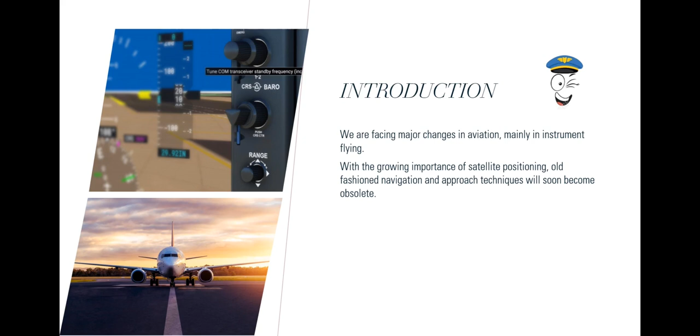Introduction. We are facing major changes in aviation, mainly in instrument flying. With the growing importance of satellite positioning, old-fashioned navigation and approach techniques will soon become obsolete. What about pilot core competencies? Are we bound to follow the line and nothing more, or should we keep training those procedures and techniques to keep what makes a pilot a pilot: mastering?

You think right if you are watching this video. Let's train as a pilot. Satellite navigation and approach techniques will be a part of your training.

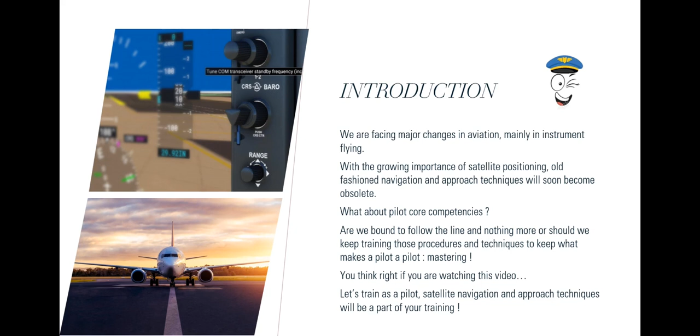Theory, system description. The non-directional radio beacon, NDB, is a low or medium frequency radio beacon that transmits non-directional signals, whereby the pilot of an aircraft properly equipped can determine bearings and home to the station. The pilot, through the use of an automatic direction finder, uses these signals in order to determine relative, magnetic bearing and therefore position.

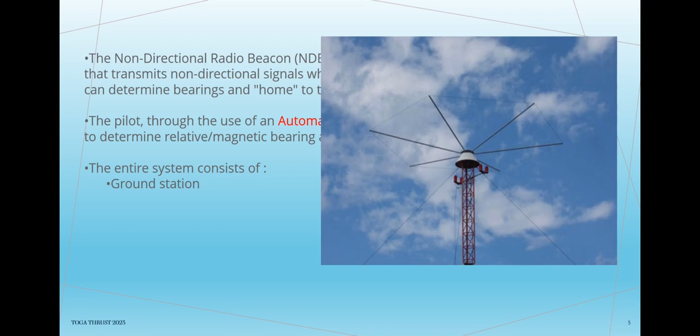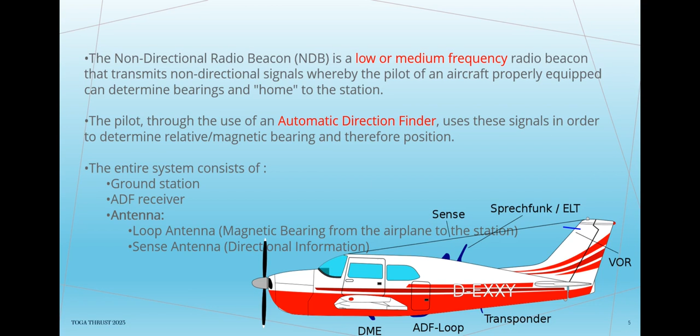The entire system consists of ground station, ADF receiver, antenna, loop antenna, magnetic bearing from the airplane to the station, sense antenna, directional information. Now, both antennas are combined into one single element. Bearing indicator.

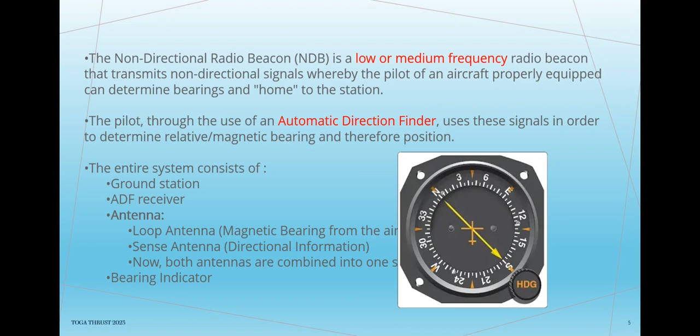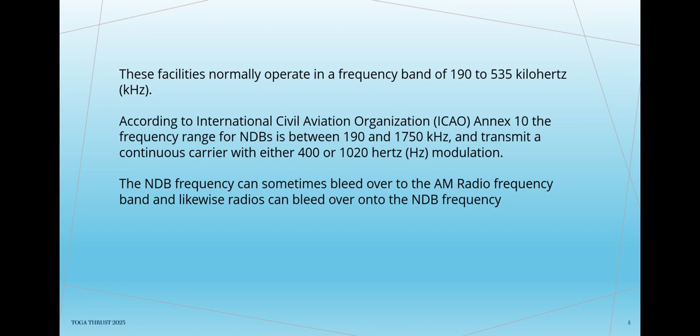These facilities normally operate in a frequency band of 190 to 535 kHz. According to International Civil Aviation Organization, ICAO, Annex 10, the frequency range for NDBs is between 190 and 1750 kHz, and transmit a continuous carrier with either 400 or 1020 Hz modulation. The NDB frequency can sometimes bleed over to the AM radio frequency band, and likewise radios can bleed over onto the NDB frequency.

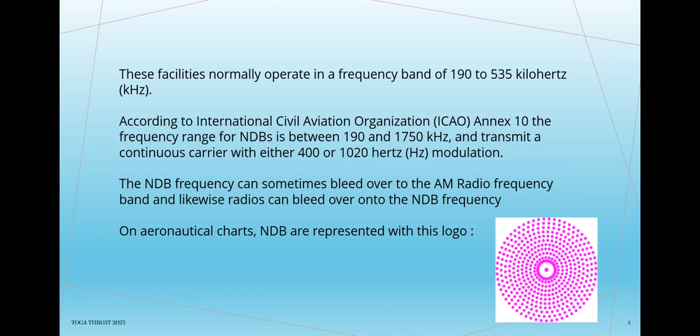On aeronautical charts, NDB are represented with this logo. All radio beacons except the compass locators transmit a continuous 3-letter identification in code except during voice transmissions.

NDB frequency and identification information is found on aeronautical charts. The Morse codes are used to identify the NDB stations, while the commercial broadcast stations are identified at random times by the station's announcer. These signals can be used to either home or intercept and track a course for navigation.

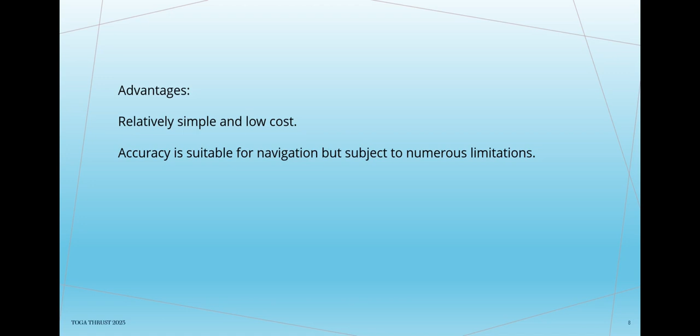Advantages: relatively simple and low cost. Accuracy is suitable for navigation but subject to numerous limitations. Not limited by line of sight, which permits reception at low altitudes over great distances due to ground waves.

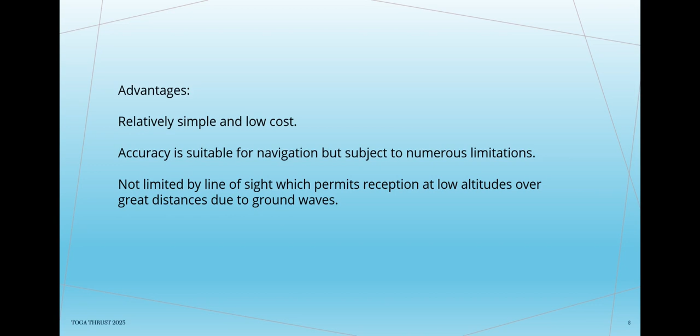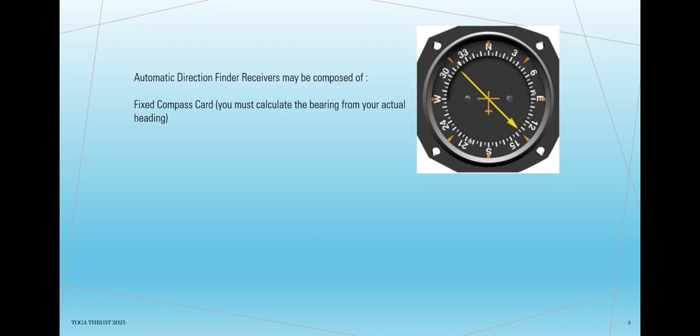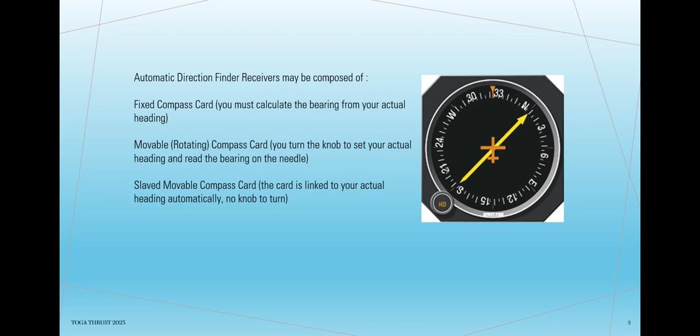Automatic direction finder receivers may be composed of: fixed compass card, where you must calculate the bearing from your actual heading; movable, rotating compass card, where you turn the knob to set your actual heading and read the bearing on the needle; and slaved movable compass card, where the card is linked to your actual heading automatically, no knob to turn.

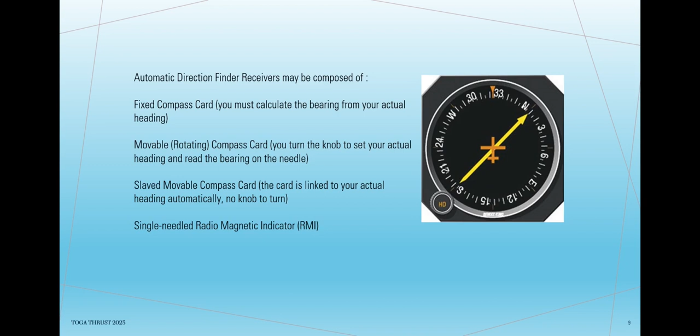Single needle radio magnetic indicator, RMI. Dual needle radio magnetic indicator, RMI, one single yellow and one double green to avoid misreadings.

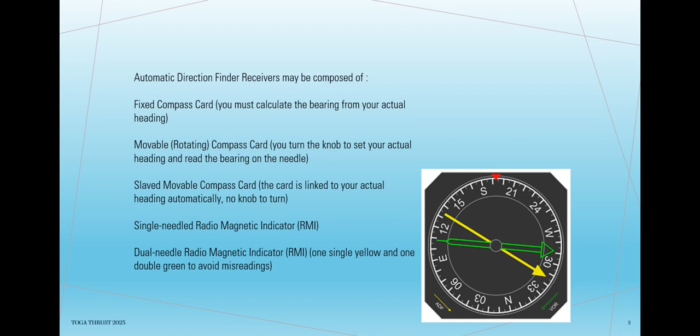Fixed compass card. A fixed compass card simply means the face of the instrument cannot rotate, leaving only the needles to move. It always represents the nose of the aircraft at 0 degrees and the tail as 180 degrees. Visualizing the situation with this type of indicator can be daunting.

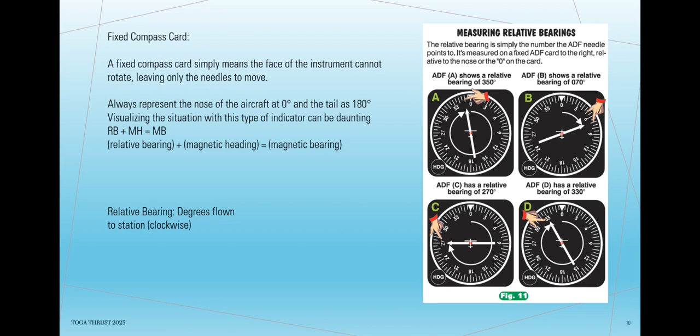Relative bearing plus magnetic heading equals magnetic bearing. Relative bearing, RB, are the degrees flown to station, clockwise. Magnetic bearing, degrees from magnetic north.

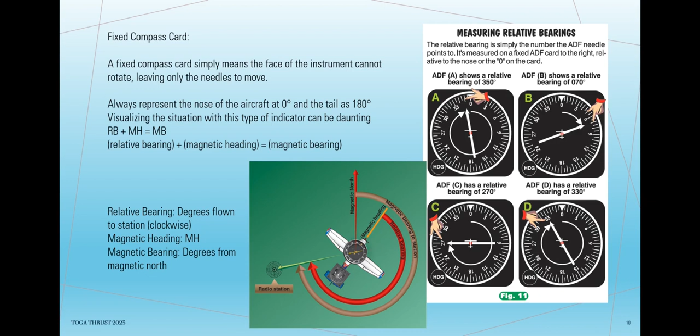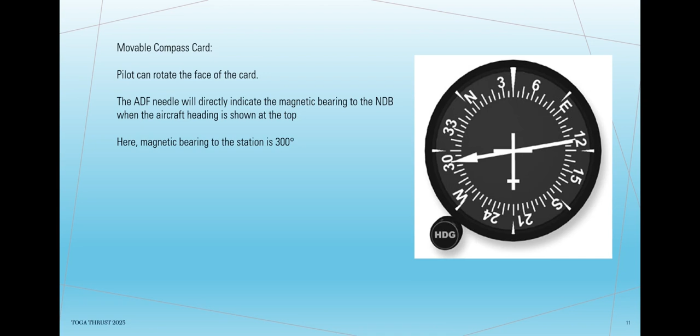Dual needle radio magnetic indicator has a second needle. Both needles may be selected as ADF or VOR station.

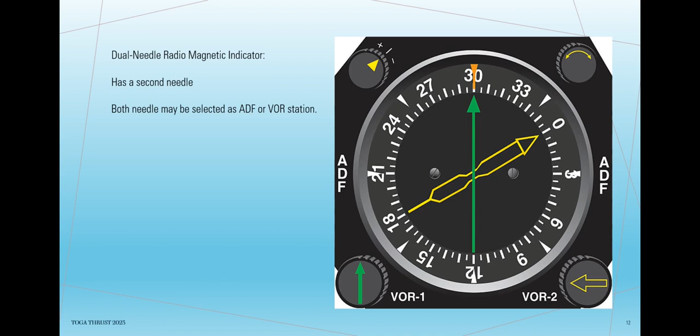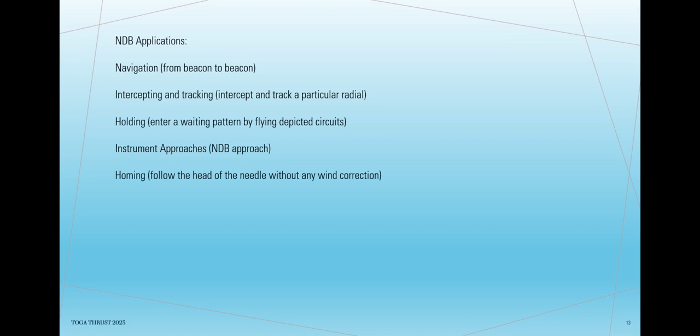NDB applications: Navigation, from beacon to beacon. Intercepting and tracking, intercept and track a particular radial. Holding, enter a waiting pattern by flying depicted circuits. Instrument approaches, NDB approach. Homing, follow the head of the needle without any wind correction. Tracking, stay centered on a particular radial correcting for the wind.

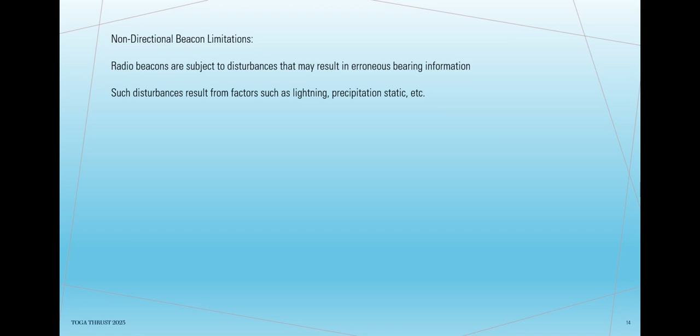Non-directional beacon limitations. Radio beacons are subject to disturbances that may result in erroneous bearing information. Such disturbances result from factors such as lightning, precipitation, static, etc. Nearly all disturbances which affect the automatic direction finder, ADF, bearing, also affect the facility's identification.

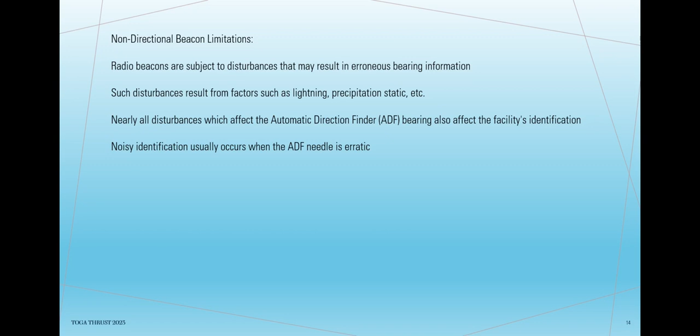Noisy identification usually occurs when the ADF needle is erratic. Voice, music or erroneous identification may be heard when a steady false bearing is being displayed. Since ADF receivers do not have a flag to warn the pilot when erroneous bearing information is being displayed, the pilot should confirm the NDB's identification. If the reception is out, the needle should either freeze, or go to park condition, 90 degrees indication.

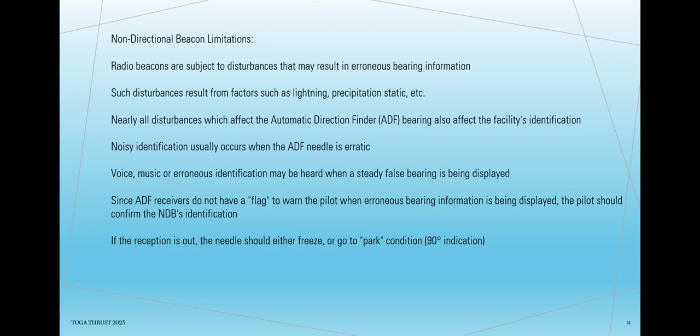Twilight error, night effect. Radio waves can be reflected back by the ionosphere and can cause fluctuations 30 to 60 nautical miles, approximately 54 to 108 kilometers, from the transmitter, especially just before sunrise and just after sunset.

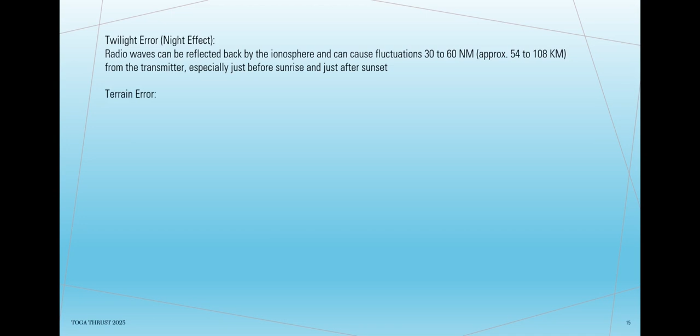Terrain error. High terrain like hills and mountains can reflect radio waves, giving erroneous readings especially if they contain magnetic deposits.

Electrical error. Electrical storms, and sometimes also electrical interference, can cause the ADF needle to deflect toward the electrical source.

Shoreline error. Low-frequency radio waves will refract or bend near a shoreline, especially if they are close to parallel to the shore.

Bank error. When the aircraft is banked, the needle reading will be offset.

Quadrantal error. Signal polluted by reflection on the aircraft's body.

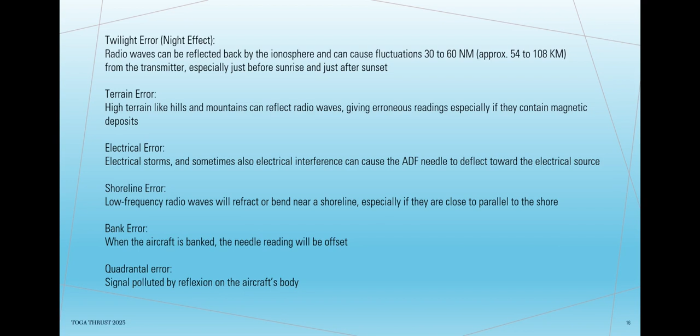Twilight error, night effect. UVs and X-rays from the sun create layers of ionized atoms in high atmosphere. Some of these layers have refractive properties, and one acts as a wall preventing waves from the ground from reaching the refractive particles.

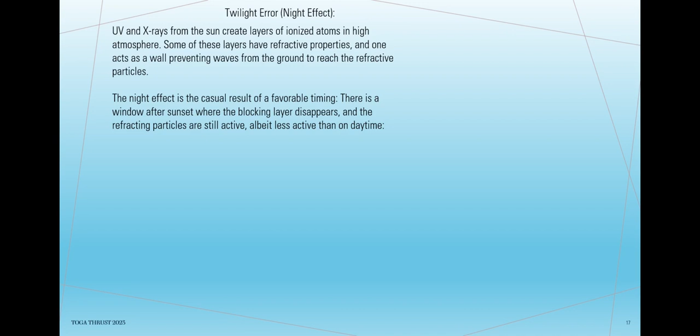The night effect is the casual result of a favorable timing. There is a window after sunset where the blocking layer disappears, and the refracting particles are still active, albeit less active than in daytime.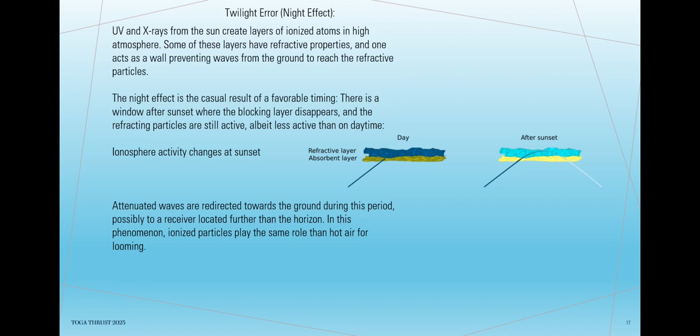Terrain error. Over mountainous regions and sandy deserts, range of NDB signal is relatively lesser than that over the sea. Reliable range from an NDB located at shore may vary in directions.

Reflection and diffraction of the radio waves in mountainous areas, mixed with ground wave, may cause fluctuations in signal. The bearings indicated may be in error, or change rapidly over such regions. Use of higher frequency in such cases may reduce the problem.

Electrical error. Considerable electrical disturbance is created by thunderstorms, for attenuated NDB signals, at long ranges.

Lightning from the thunderstorms produces strong signals and causes the ADF pointer to swing from the direction of the NDB towards the electrical storm. Totally incorrect indications may be obtained during such adverse weather conditions.

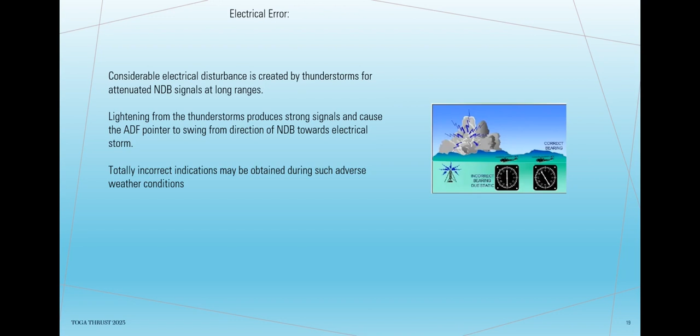Shoreline error. Radio waves passing the coastline at small angles suffer refraction due to different conducting and reflecting properties over land and sea.

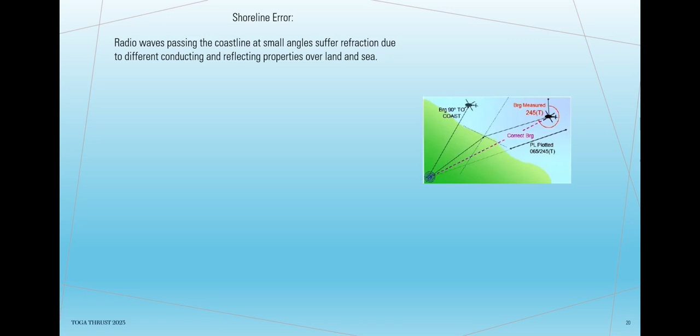A false bearing indication is obtained at an aircraft flying over sea and taking bearings from an NDB located over land. The effect is less for an NDB on coast than one inland, and on a bearing 90 degrees to the coastline than at an oblique angle. Hence, given the choice, use the beacon at coast and rely on bearings perpendicular to the coastline.

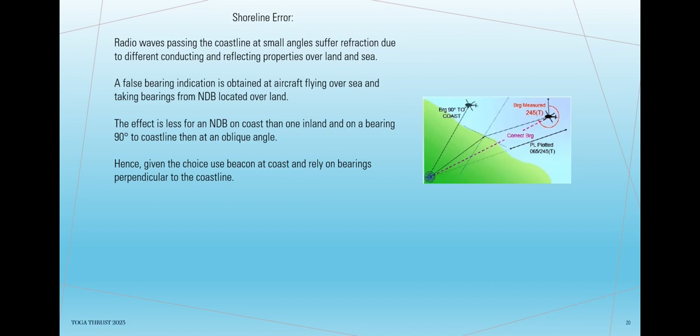Bank error, or dip error. To make things simpler, the needle will lie to you.

The end of the needle will move towards the low wing in a turn, making analysis of the magnetic bearing impossible until the wings are back to level. Then the needle will slowly come back to the correct reading.

You can anticipate the correction for your rollout by considering an error of about 10 to 15 degrees.

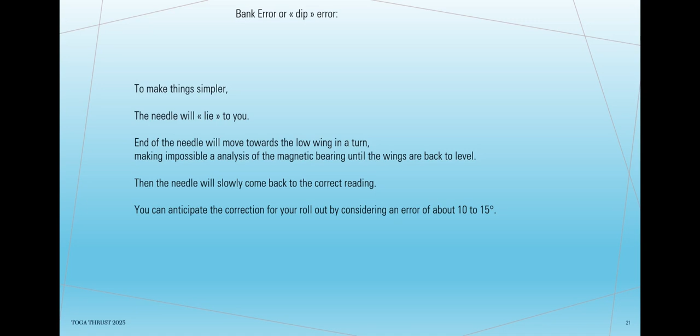Quadrantal error. NDB signals may reach the receiver aerial directly, and also after being reflected by the aircraft body.

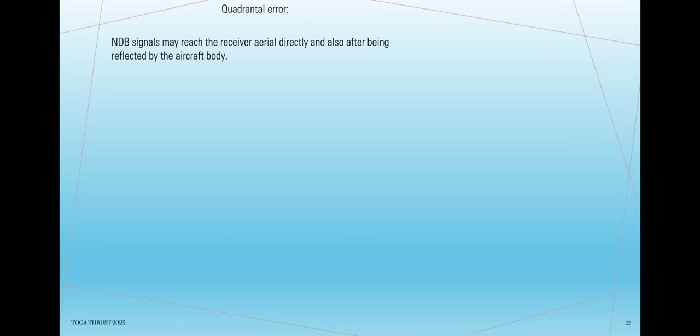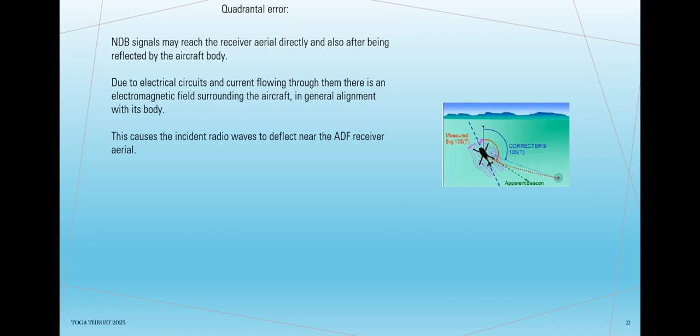Due to electrical circuits and current flowing through them, there is an electromagnetic field surrounding the aircraft, in general alignment with its body. This causes the incident radio waves to deflect near the ADF receiver aerial.

The mixed signal affects the null position and the bearing indicated may be in large error. The maximum effect is at quadrantal relative bearings of 045, 135, 225 and 315 relative to heading. Modern installations are compensated for this error.

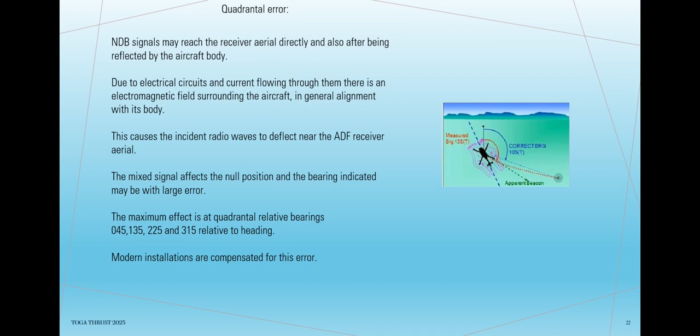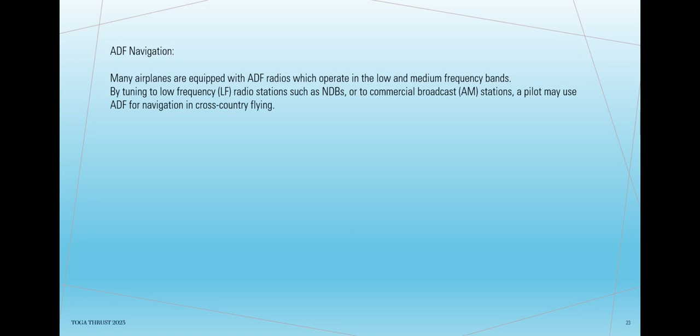ADF navigation. Many airplanes are equipped with ADF radios which operate in the low and medium frequency bands. By tuning to low frequency, LF, radio stations such as NDBs, or to commercial broadcast, AM, stations, a pilot may use ADF for navigation in cross-country flying.

Some major commercial broadcast station locations and frequencies are shown on sectional aeronautical charts. Most ADF radio receivers' signals are in the frequency spectrum of 190 kHz to 1750 kHz, which includes LF and MF navigation facilities, and the AM commercial broadcast stations.

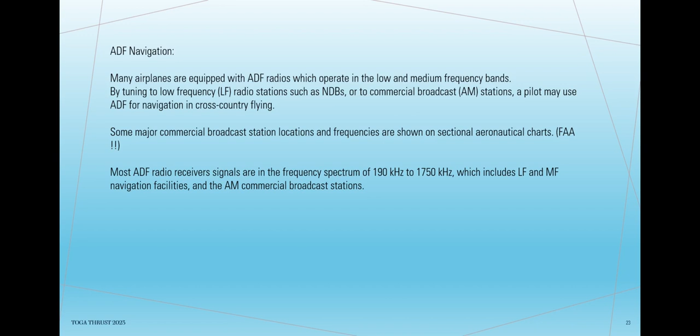The ADF has automatic direction-seeking qualities which result in the bearing indicator always pointing to the station to which it is tuned. That is, when the bearing pointer is on the nose position, the station is directly ahead of the airplane.

When the pointer is on the tail position, the station is directly behind the airplane, and when the pointer is 90 degrees to either side, wingtip position, the station is directly off the respective wingtip.

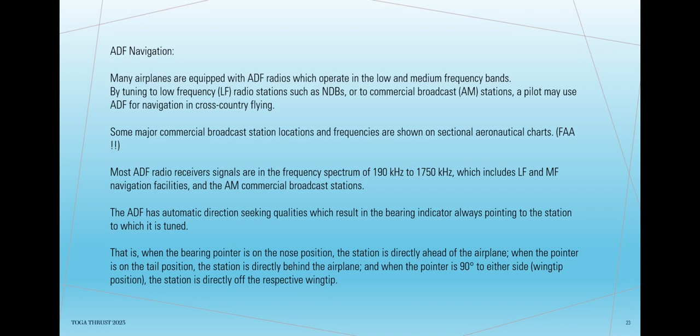The easiest, and perhaps the most common method of using ADF, is to home to the station. Since the ADF pointer always points to the station, the pilot can simply head the airplane so that the pointer is on the 0 degrees or nose position.

The station, then, will be directly ahead of the airplane. With a crosswind, however, the airplane would continually drift to the side and, unless a corrective change in heading is made, would no longer be flying straight to the station.

This would be indicated by the pointer moving to the upwind side of the nose position on the dial. By periodically turning the airplane into the wind, toward the head of the pointer, so as to continually return the pointer to the 0 degrees position, the airplane can be flown to the station, although in a curving flight path as a result of wind drift.

The lighter the crosswind and the shorter the distance from the station, the less the flight path curves.

Upon arrival at and passing the station, the pointer will swing 180 degrees from a nose position to a tail position.

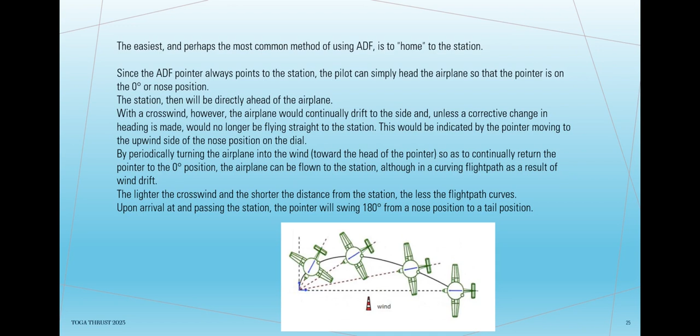One of the several valuable uses of ADF is the determination of the airplane's position along the course being flown. With 2 NDB stations, you can obtain 2 radials. Plotting those 2 radials on a navigation chart will give you your actual position.

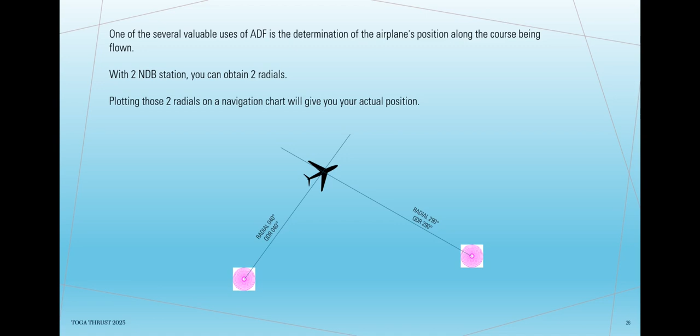NDB bearing tracking. When necessary to follow a course directly to or from an NDB while making necessary corrections for wind, after the course has been intercepted, maintain the heading that corresponds to the course to or bearing from the station.

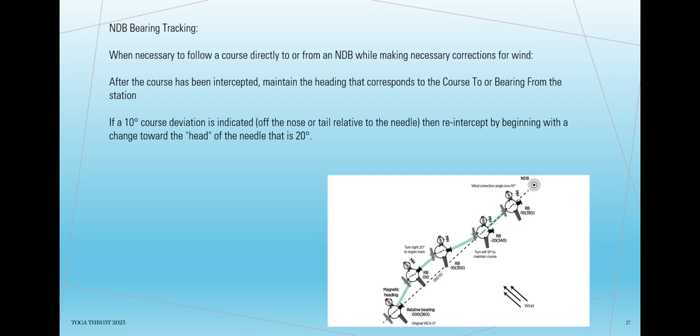If a 10 degrees course deviation is indicated, off the nose or tail relative to the needle, then re-intercept by beginning with a change toward the head of the needle that is 20 degrees.

Maintain the intercept heading until the angle of deflection from the nose or tail is 20 degrees and then turn to a new course heading by taking out half of the intercept angle. This new heading is the new relative bearing.

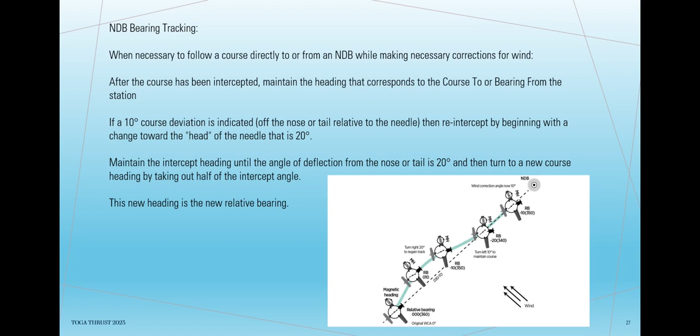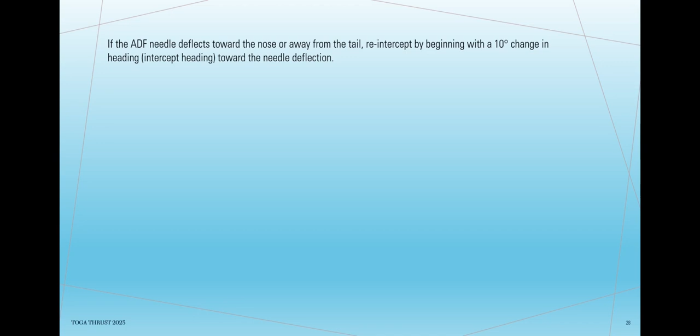If the ADF needle deflects toward the nose or away from the tail, re-intercept by beginning with a 10 degree change in heading, intercept heading, toward the needle deflection. Maintain the intercept heading until the deflection angle equals the intercept angle, deflection equals correction, and then turn back to a new course heading by taking out half of the heading change. Note that larger correction angles can be used if the wind requires.

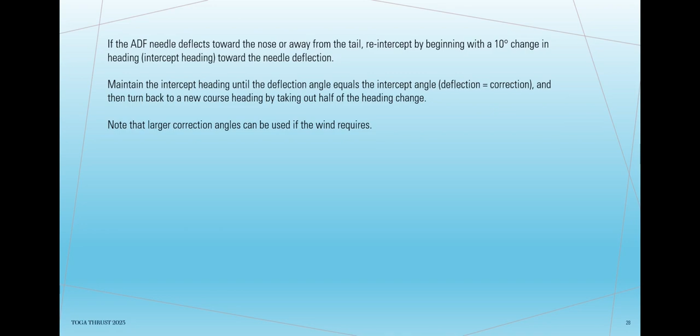Tracking radials. No wind correction, dogleg.

Heading to the station, you just pick up the heading corresponding to the magnetic bearing to the station, QDM. For example, the picture here under with a QDM of 171 degrees, we then take a heading of 171 degrees, which is perfect in a no-wind condition. But if there is a crosswind component, the wind will push the aircraft away from its original QDM and the aircraft will fly a dogleg to the station, which is not the goal of the navigation.

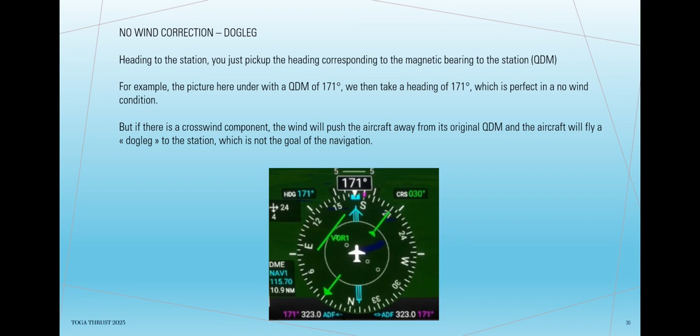Let's visualize the problem in a short video. As you can see, we start the tracking with a QDM 171 degrees, but we have a crosswind of about 23 knots and we apply no correction for that wind.

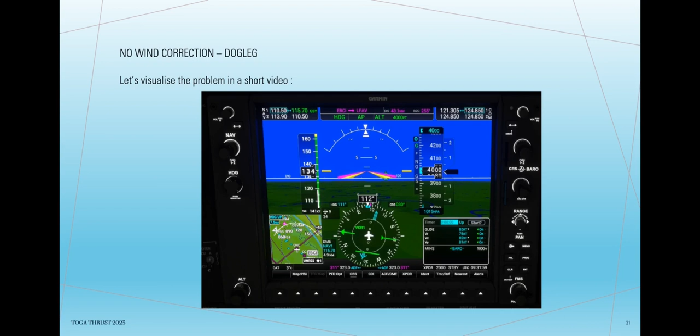With wind correction, tracking. Heading to the station, you just pick up the heading corresponding to the magnetic bearing to the station, QDM. For example, the picture here under with a QDM of 171 degrees, we then take a heading of 171 degrees, which is perfect in a no wind condition. But now, we take the wind into account and we apply a wind correction to stay on our QDM of 171 degrees.

What correction should we apply? Airspeed number is equal to the TAS divided by 60. In our case, ASN is equal to 141 divided by 60 equals 2.35. So the correction to apply is equal to the crosswind component, 23 knots, divided by the ASN, 2.35, equals plus or minus 10 degrees, 9.8 degrees.

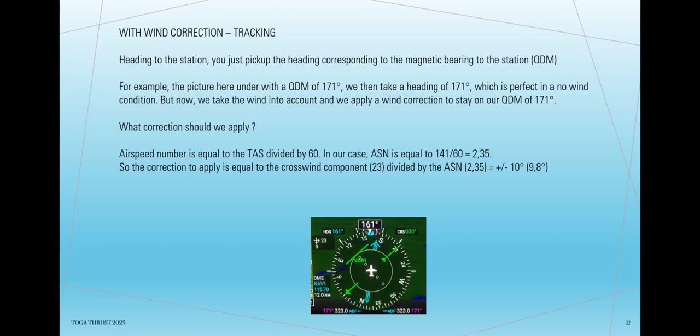Let's then apply a 10 degrees correction against the crosswind. Crosswind is from the left, so take a correction to the left of 10 degrees. 171 degree minus 10 degrees equals 161 degree.

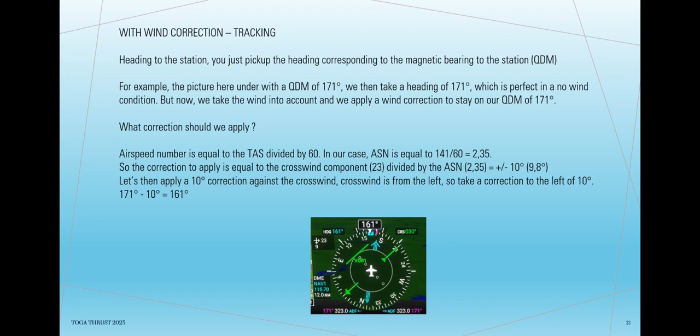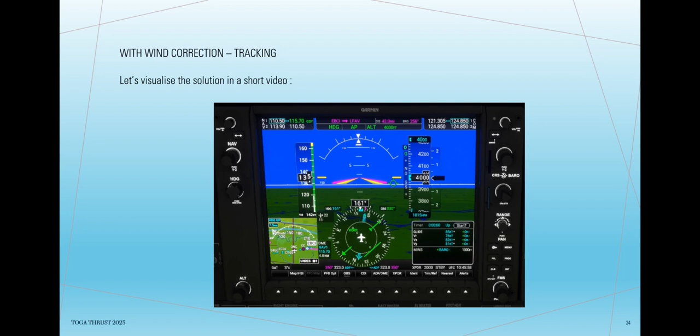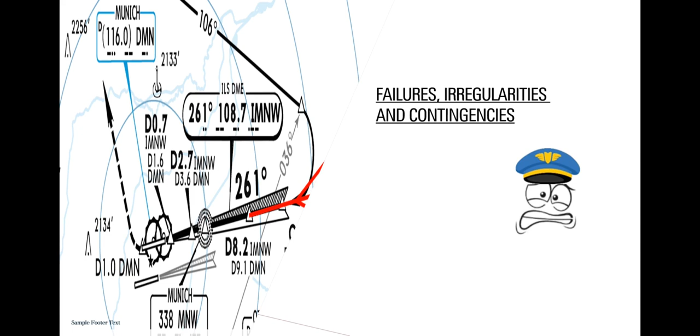Failures, irregularities and contingencies. The NDB being the most basic means of navigation existing, it is also in the process of being decommissioned. It is difficult to prepare a downgrade.

In the event of a system failure, the only solution from an approach or navigation point of view is to upgrade to a more precise means of navigation, VOR, GPS. It should be noted that, in the event of a breakdown, no warning flag will be in sight of the pilot.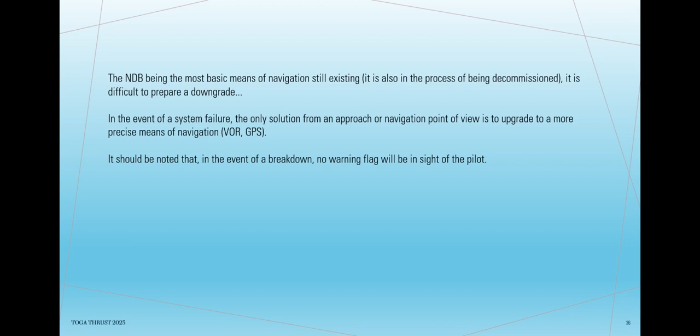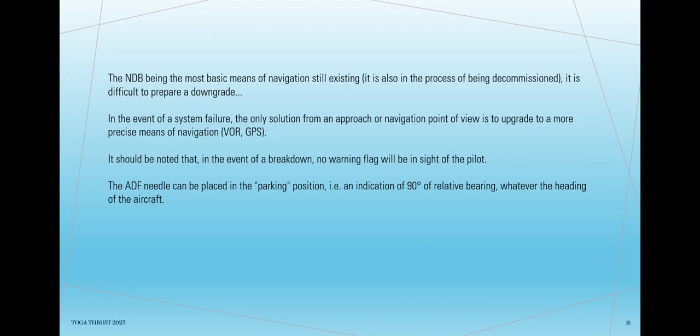The ADF needle can be placed in the parking position, an indication of 90 degrees of relative bearing, whatever the heading of the aircraft. Some instructors advocate listening to the NDB identification throughout its use, but this is not mandatory from an EASA regulations perspective.

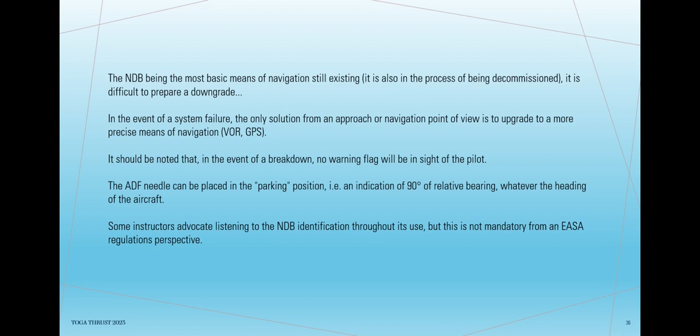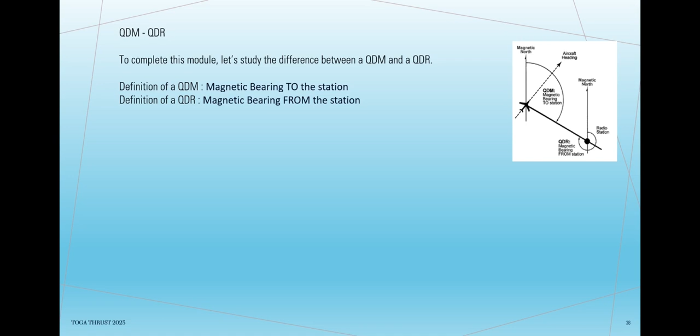QDM, QDR. To complete this module, let's study the difference between a QDM and a QDR. Definition of a QDM, magnetic bearing to the station. Definition of a QDR, magnetic bearing from the station. On this picture, we see that, under no wind condition, our magnetic route to the beacon is 171 degree. The QDM is 171 degree and we are on the radial 351 degree from the station. So the QDR, magnetic bearing from the station, is 351 degree as we are on the radial 351 degree from the station.

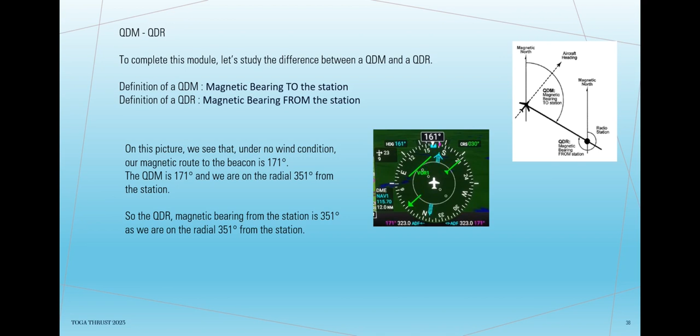Some exercises. Head of the needle, 304 degrees. So the QDM is 304 degrees and we are on the radial 124 degrees from the station. So the actual QDR is 124 degrees.

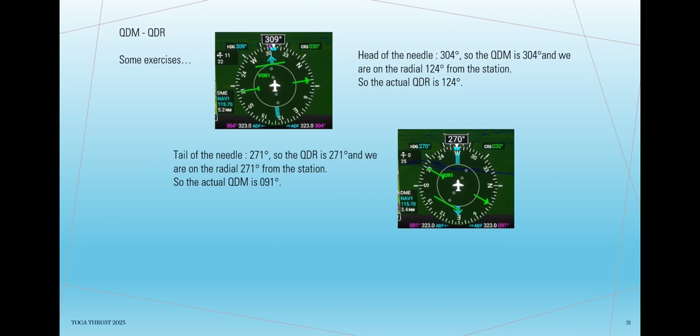Tail of the needle, 271 degree, so the QDR is 271 degrees and we are on the radial 271 degree from the station. So the actual QDM is 091 degree.

Tail of the needle, 249 degrees, so the QDR is 249 degrees and we are on the radial 249 degrees from the station. So the actual QDM is 069 degrees.